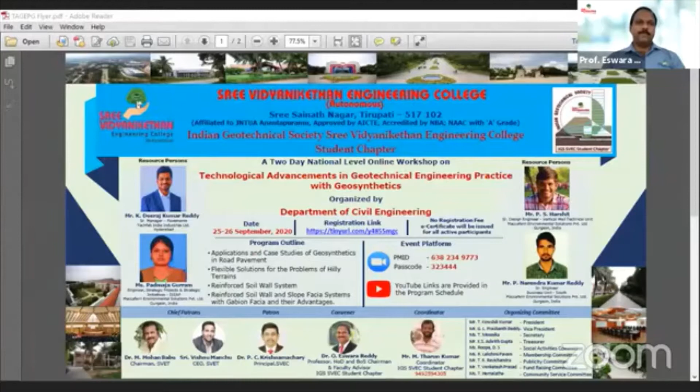This is the intention of this particular workshop, how it has been designed, and today is the implementation, day one. So I thank all the alumni, Padmaja, Dheeraj Kumar Reddy, Harshit, and Narendra Kumar Reddy. Fortunately, except Harshit, the remaining students are my project students. I appreciate their commitment and sincerity and discipline in delivering their duties at their own companies.

Whenever I call, they are responding in a positive way, contributing back to the institute in the form of continuous interaction, technically, as well as internships or placements, whatever it is. In these 2 days, we have 2 lectures each day. On day one, Padmaja and Mr. Dheeraj Kumar Reddy, and on day 2 we have Harshit and Narendra Kumar Reddy.

Majority of these 4 lectures are focusing on how best we can use geosynthetics in stabilizing various structures, in the field of pavements as well as geotechnical engineering, especially transportation engineering supporting structures like retaining walls and slopes, and how to stabilize soil wherever it has stability problems.

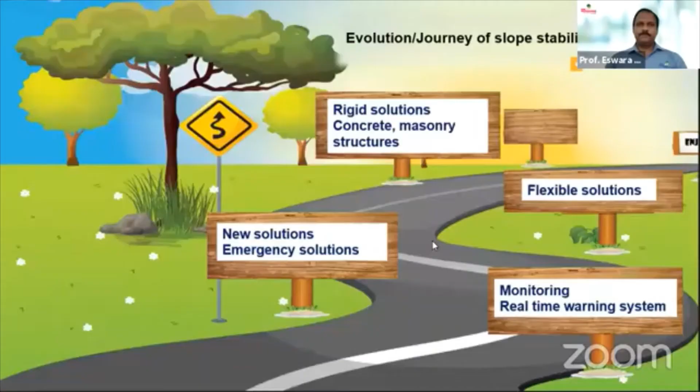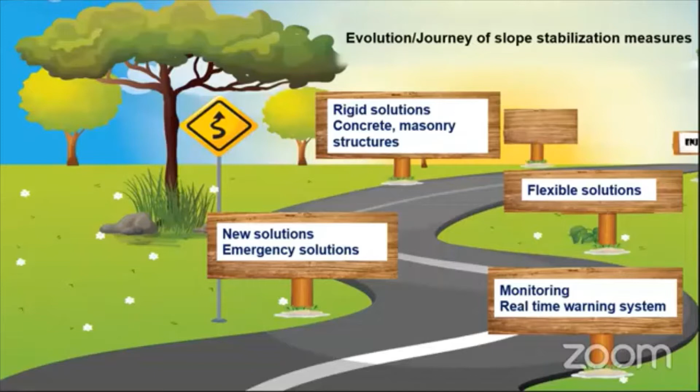So today I am going to talk about flexible solutions for the problems of hilly terrains. In this context, I will cover what are the challenges that we are facing in hilly terrains nowadays, and what are the remedial measures to mitigate these problems, along with case studies. There are solutions like avoiding or eliminating the problem itself, use of flexible materials, use of rigid solutions, and emergency solutions. There are so many varieties of mitigation systems which we can choose.

Coming to the next slide, before moving to the new materials and techniques for hill slope stabilization, let us see what are the challenges in hilly terrains. These are the typical landslides occurred in the Himalayas. I'm switching on, so you can see how massive these landslides are.

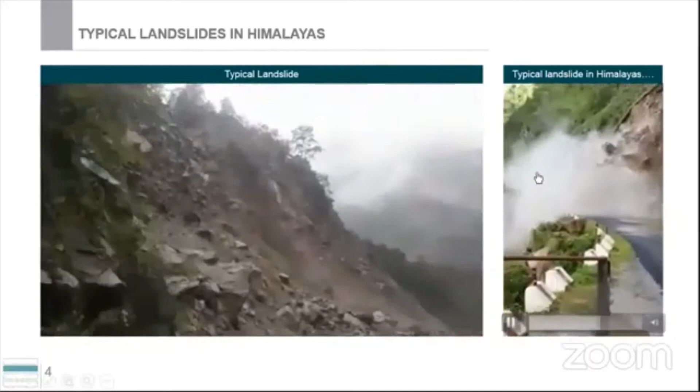Moving to the next slide, the slope instability scenario in our country. These landslides in the Himalayas are becoming a perennial problem. Each year during monsoons, at least four or five landslides are occurring in the Himalayas. Not only in the Himalayas, but also in northeastern regions, the Western Ghats, and the Nilgiris. So in a year during monsoon, so many landslides are occurring in our country.

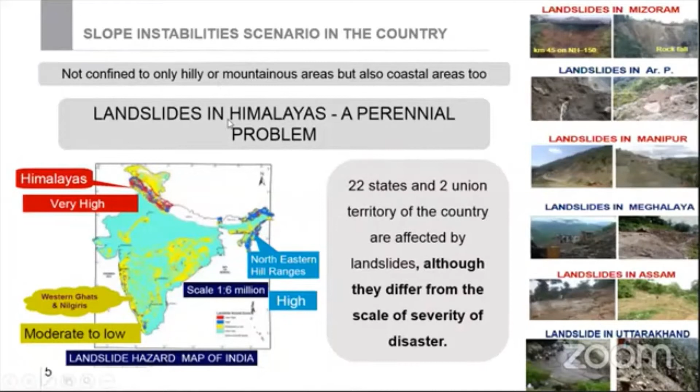22 states and 2 union territories of the country are affected by landslides, although they differ in scale of severity of disaster. Here I have listed where landslides have happened in different states or parts of the country. So landslides are not confined to only hilly or mountainous areas, but also to coastal areas.

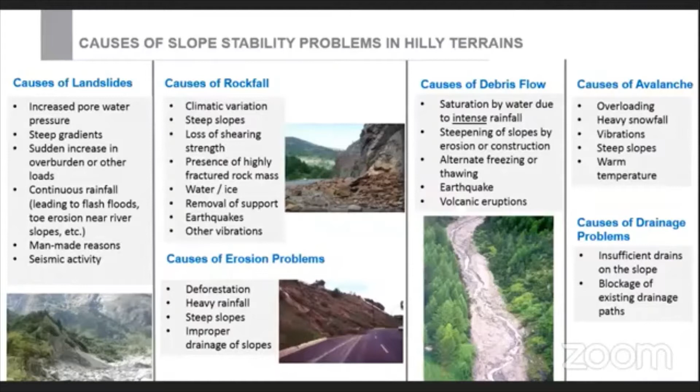Then what are the causes of rockfall? The causes of rockfalls are climatic variation, steep slope, and losing shear strength - as I told you with landslides, losing shear strength is one cause. Also the presence of highly fractured rock mass and weathered rock. If weathered rock or presence of high faults and folds are there, pore water will enter into that rock type and it will ultimately lose its shear strength. Then removal of support, earthquakes, and other vibrations.

Then what are the causes of debris flow? Debris flow is a mass movement of soil, water, mud, rock, and air - it flows like a mass movement, as we can see here. The causes of debris flow are saturation by water due to intense rainfall, steepening of slope by erosion or construction, alternate freezing and thawing, earthquake, and volcanic eruptions. Then we have listed the causes of avalanche here.

In landslides or rockfall, before treating mitigation measures for landslides, rockfall, or any other problems, we have to first concentrate on drainage problems. We have to plan the drainage network - how the hill, road, and valley are arranged, from where water comes from the hillside and how we divert that water on the road, and from the valley side, how we divert that water into the valley side river.

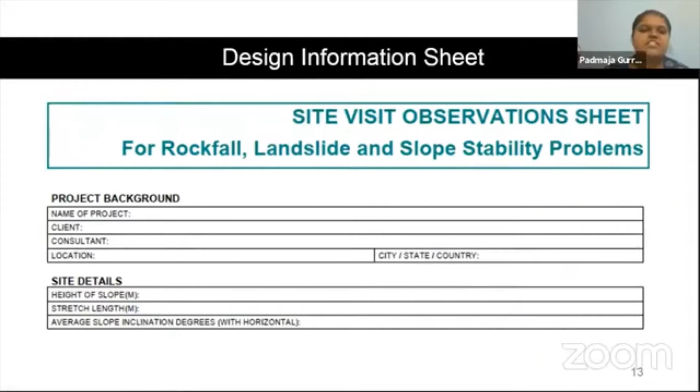The sheet includes project background and site details—if a slope is there, its height, stretch length, and average slope inclination, then condition of the slope. The crest is on top, and we note whether it's rocky or has overburden. By visualization we fill this design information sheet, noting type of strata, nature of slope—natural, excavated, or cut—and method of cutting adopted, and condition and type of rock or soil.

Then we check if there is any vegetation on the slope, and if so, what type of vegetation is present. We have to fill all these details first.

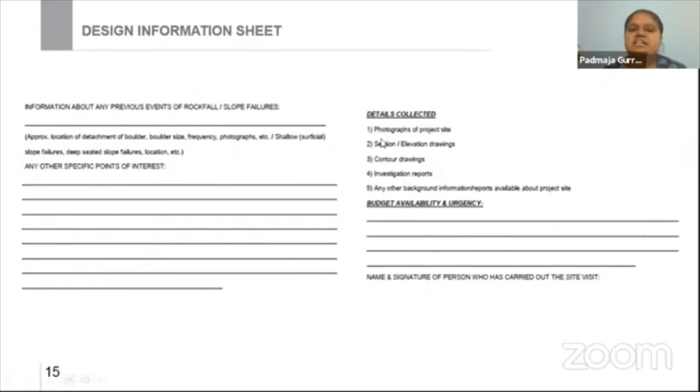Then we collect photographs of exactly where the problem is, and also from far distance to visualize the hillside, road, and valley side. We also try to get contour drawings and investigation reports if possible—these are the preliminary investigation details.

By site investigation we collect these details and can draw, by visual observation, how the hillside, road, valley side, and river are positioned. By seeing that, we can estimate approximate details, not exact ones.

For example, the slope angle here is 60 to 70 degrees and slope height is 30 meters. Vegetation is present—dense vegetation on soil—and the type of soil is a boulder-mixed strata. This much detail we can fill from site visit observations.

After filling the site visit observation details, we move to detailed field investigations. This means geological investigation—we do geological and geomorphological study.

Geological study tells us which type of rock is present, along with RMR values, RQD values, and faults and folds present there. Geomorphological mapping gives the landscape and landform overview.

Then geophysical study is an easy way to determine the subsurface profile. And geotechnical investigation involves field and laboratory investigation for soil and rock slope, plus hydrological investigation—these are the investigations normally done.

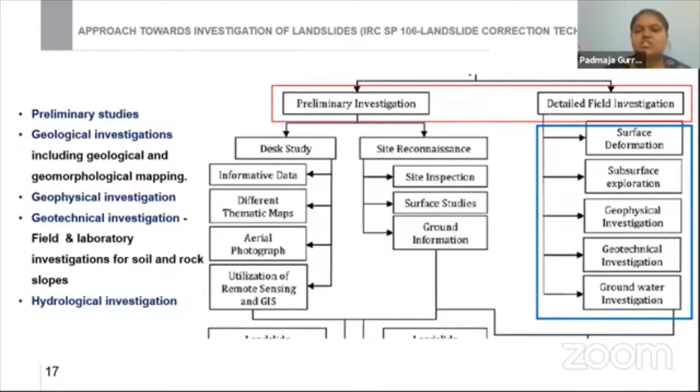After all these investigations, we determine the shear properties and other parameters. Then we choose mitigation measures depending on site conditions and various factors like availability of local material, space at the bottom of the valley side, and space at the bottom of the hillside. We have to choose the most suitable mitigation measures for that particular site.

For that we have to perform slope stability analysis, which we can do either using Slide software or other in-house software.

Then design of mitigation measures - we have to do the design for that. Mitigation measures here include hillside cutting, erosion control measures, nailing or anchoring, then retention measures, reinforced soil systems, Gabion walls, etc. So these are the many systems we have to design.

After that, construction and survey. So this is the steps.

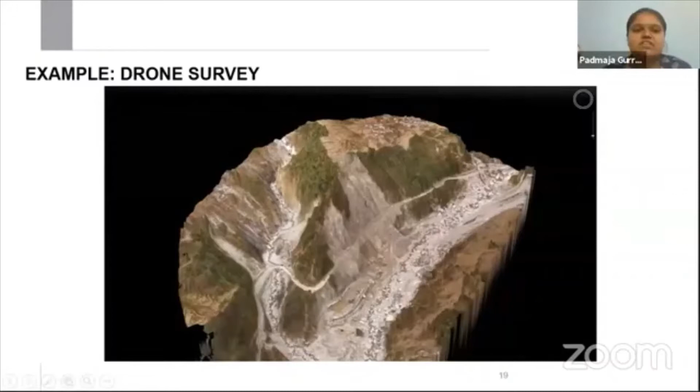So we have to do monitoring also, because other landslide prone areas are moving - these are moving, as I told you, more than 1 centimeter in a year it is moving. So our structure, whatever we are providing, needs to accommodate that movement.

Once you provide rigid structures like RCC walls, random rubble masonry walls, cantilever walls, counterfort walls - if you provide those retaining systems as a mitigation measure, it will not accommodate the movements of the Himalayas or other landslide prone areas. After some time, once it gets those movements, cracks will automatically develop on the surface of that rigid structure.

So in those cases, to accommodate the movements or displacements, we have to go with flexible solutions. What flexible solutions will do is accommodate the movements, so it will not crack. I will show you.

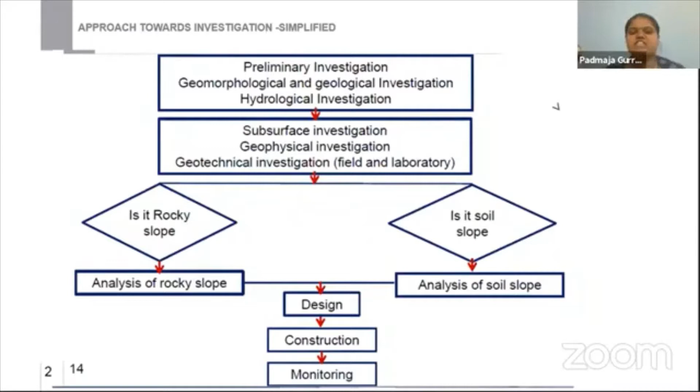So these are the investigation reports - engineering investigation, communication between engineers, field observation we have done, then laboratory test. It will come from the investigation reports and results of field survey, estimate engineering properties of slope, then achieve engineering purposes.

Then solution for the problems of hilly terrains. So we have seen what are the problems and challenges we are facing in hilly terrains and what are those causes. And we have seen detailed investigation. Now we are going to talk about solutions for the problems of hilly terrains.

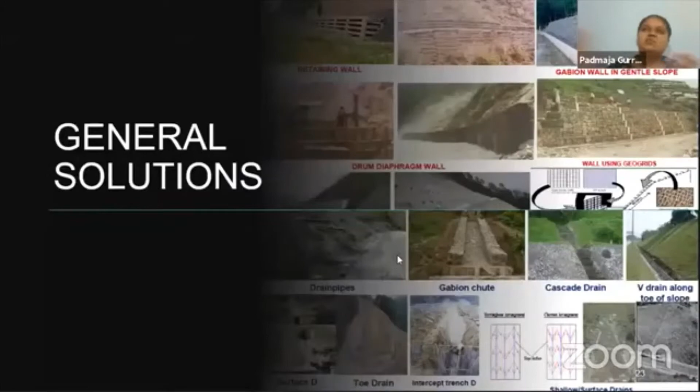So what are the general solutions? Just providing one masonry wall or one retaining wall will not solve the problem. In this situation, we have to go with a multidisciplinary approach - combinations of solutions we have to use.

So what are those solutions normally we will do? Avoiding the problem or choosing an alternative alignment or relocation. Then use of lightweight materials in construction or rehabilitation. Then modification of slope geometry to minimize driving forces and or improve resisting forces. Then provision of surface and subsurface drainage measures, ensuring holistic drainage network, erosion control and other surface protection measures, provision of restraining, retaining and protective structures - rigid and flexible systems, treatment or training of slopes subjected to hydraulic forces from water bodies, improvement in internal stability of slope by nailing, anchoring, grouting and micropiling, rockfall mitigation measures, debris flow mitigation measures and emergency measures. So these are the many solutions available nowadays.

So we can go one by one. First one is avoiding or eliminating the problem itself. If a new alignment is going through hilly terrains and huge landslides happen there, what do we have to do? We have to either do complete removal of the slide or provide complete mitigation systems, or we have to go with bridging or tunnel.

If we are not able to provide complete mitigation measures there, we have to go with the option of facility relocation. Here the facility is this highway - if a new alignment highway is going, we have to relocate this alignment, meaning we have to move to another area.

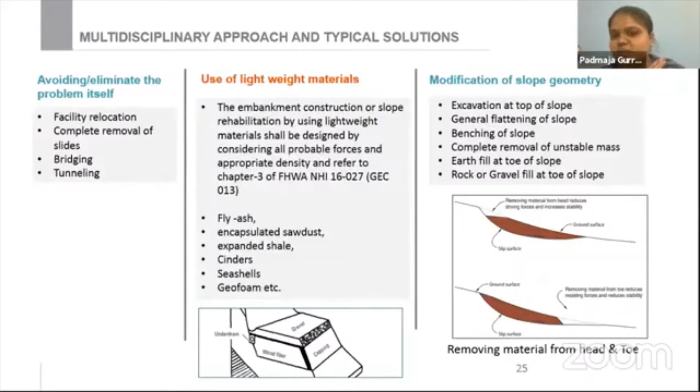Then modification of slope geometry. Here excavation at top of slope, general flattening of slope, benching of slope, complete removal of unstable mass, earth fill at the toe of slope, rock or gravel fill at the toe of slope. Modification of slope geometry means, normally if we have to widen the road, if the current road width is 7 meters, now we have to widen it to 12 meters. What we have to do is either cut the hill or increase the valley side retention. So when we have to do hillside and valley side both cutting or filling, we have to maintain a balance between both.

Then benching of slopes are also used to control erosion in soil cuts and establish vegetation. After this, it will provide some erosion control measures, some vegetation turfing or vegetation mats we will provide. So ultimately it will support erosion control measures.

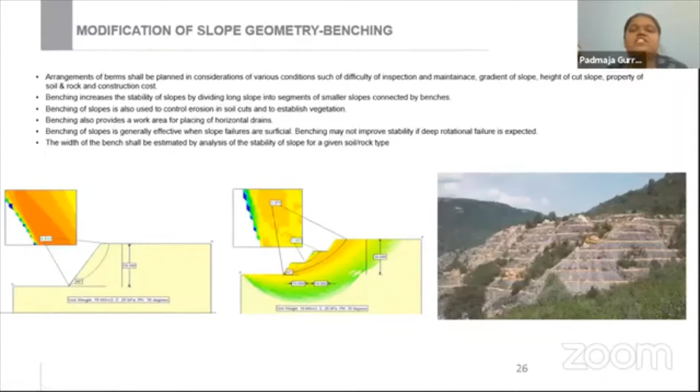Then modification of slope geometry. The objective of routine cuts and fills is to create road space for the road template. So we are going to create the road space, like for widening or new alignment. Then to balance the material, to minimize slope instability over time, not to be a source of sediment, and to minimize the long-term maintenance cost.

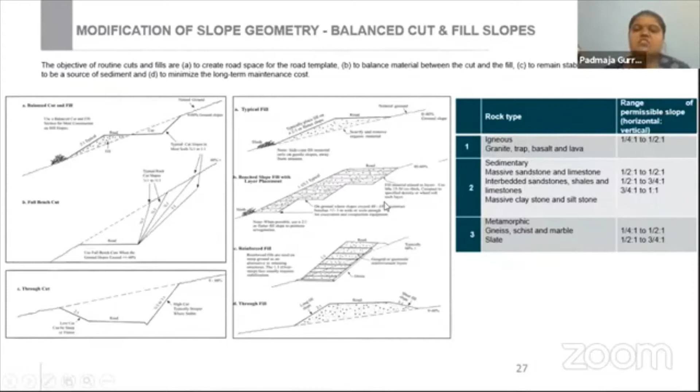Then drainage measures. As I have been telling from the start, drainage is a very important phenomenon in landslides. Improper drainage is a major triggering factor for landslides. So what are the different types of drainage measures? First is surface drainage measure, and next is subsurface drainage measure.

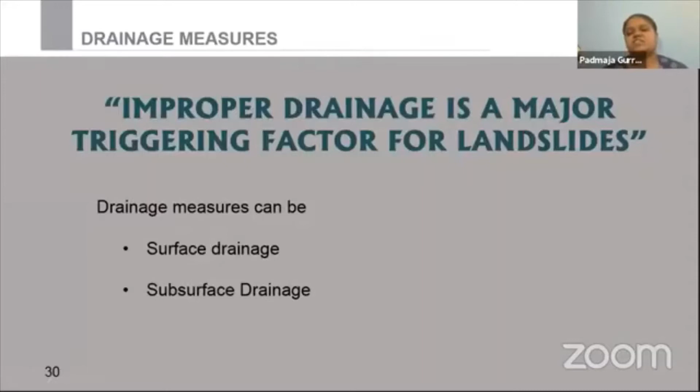Surface drainage measures are of 3 types: catch water and intercept drains, chute drains, and roadside drains. Catch water or intercept drains mean it is catching water from the hillside and diverting it to the next channeling media. So this is about the catch water drain and chute drain.

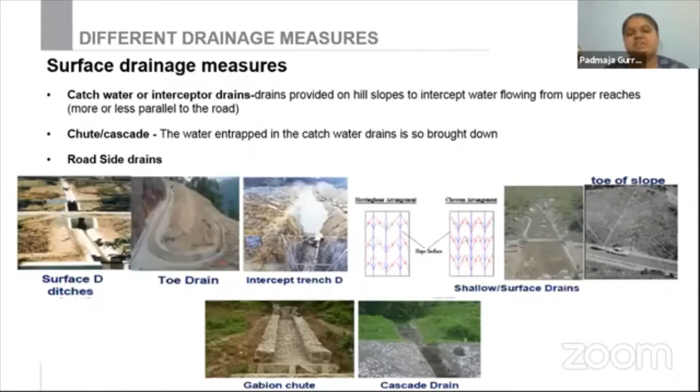This is the simple cross section we have made. Normally people provide chutes with concrete masonry and all, but here we have provided with gabion mattress. Then roadside drains along the road - all along the road we provide one roadside drain to capture the water from the hillside. So these are the catch water drains.

Then moving to the subsurface drainage measures: horizontal pipes, cut-off drains, drainage trenches, drainage blankets, internal drains of the reinforced soil system. These are the rockfall mitigation systems - I will take that up later.

So drainage pipes are there, horizontal drainage pipes are there. Whatever pore water pressure has developed comes out through these horizontal pipes. This needs to be designed and installed.

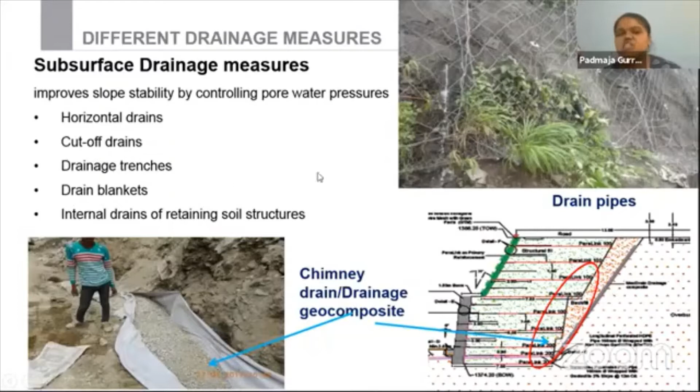In the reinforced soil system, in this area, we have provided a chimney drain. Chimney drain means a 600 mm aggregate layer - aggregate packed in geotextile that we provide here, or alternatively we can provide a drainage composite. These are the horizontal drains, installed like this. These are some examples.

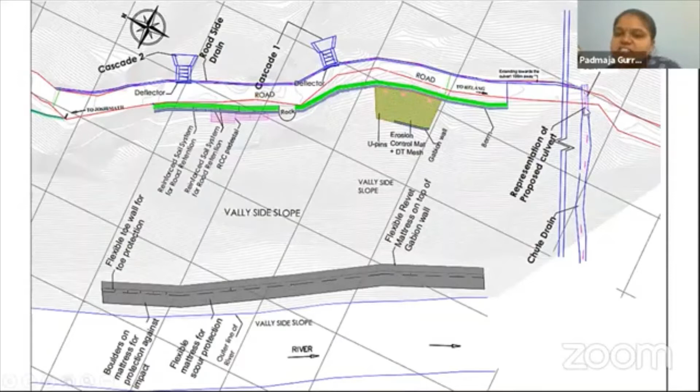Starting from the hillside itself, an existing culvert is there, and we are merging this existing culvert with the chute drain. This chute drain is directly touching the river. So this water from the hillside is directly diverted through the hillside to the river. This is the drainage plan.

Then retention systems - what are the rigid solutions? Normally random rubble masonry wall as a retaining wall we provide, and PCC retaining wall and RCC retaining walls, cantilever retaining wall, counterfort retaining wall, diaphragm retaining walls. These are the different types of rigid retaining measures.

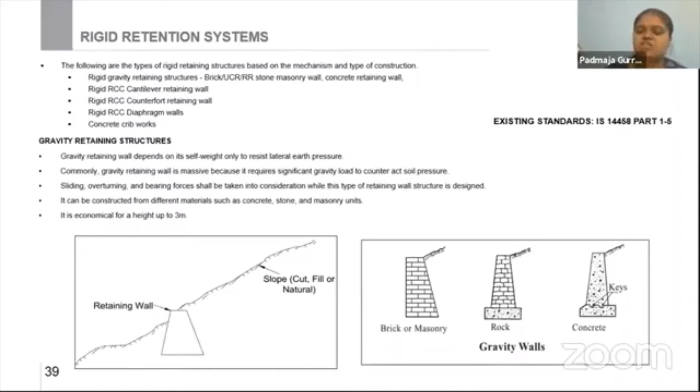But when we provide rigid retaining measures in places where movements are happening, they get shaken and develop cracks. Because of this, we cannot choose rigid gravity retaining structures. We will always go with flexible solutions - flexible solutions meaning gabions.

Gabion is a cage or box of twisted hexagonal steel wire mesh. It looks like this. After making these cages, we fill them with boulders or stones, then form a structure like this. Here, this is the backfill soil, and non-woven geotextile we have provided for soil protection and filtration. This is the ground level.

Here, one unit we have provided below the ground layer. This is called embedment depth. So these are the things.

Gabion retaining structures are commonly used retaining walls in hilly areas because of their flexibility and sustainability against dynamic forces like seismicity, seepage forces and flash floods. Because it is a porous structure, it gives good drainage. It will not develop pore water pressure as normal retaining walls do.

So these shall be preferred in case of poor foundation or seepage conditions, and can take considerable differential settlement and some slope movements. Wherever movements are happening in those areas, Gabion walls as a flexible measure are suitable. It is also employed for construction of erosion control measures, drainage structures, retaining walls, breast walls, and used to stabilize steep slopes in combination with other measures.

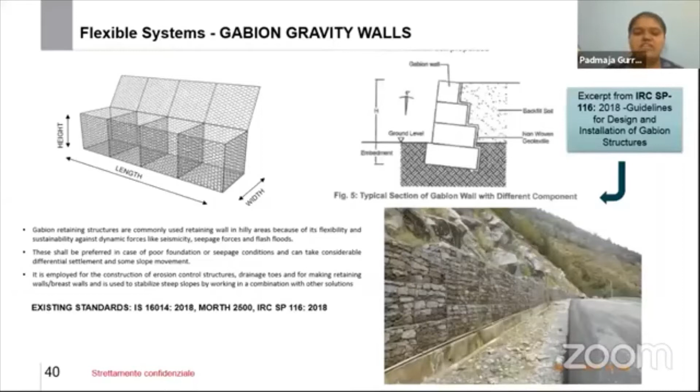So, normal design checks as we normally do for conventional retaining walls, we will do overall failure and global stability checks, then failure of foundation bearing capacity, sliding, overturning, and internal failure checks.

Moving to the next slide, these are the different standards available in our country now. This is IS 16014, 2018. It was revised in 2018. It gives the materials - boxes are made up of steel wire mesh - the material specification of the steel wire mesh, box dimensions, and properties like tensile properties, puncture strength, and pull apart strength. All these details are given in IS 16014.

Then similarly, MORTH also talks about material specification. IRC SP 116, 2018, talks about complete design and installation. Before these codes were published, like IS 16014 and IRC SP 116, these were not there during 2008-2010. At that time we were using BS 8002. This was published in 1998, the ASTM codes.

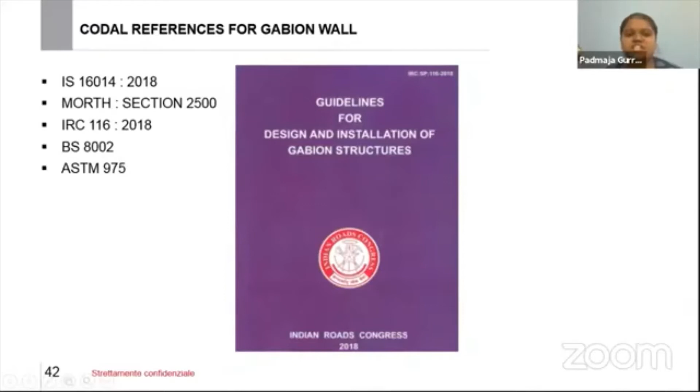Then what are the major advantages of gabions? The whole system is sustainable, green and flexible.

As I told you, this is a porous structure, and this structure we are going to fill with stones, rocks or boulders. So pore water pressure is released here, and it will not develop in the backfill. So this self-draining nature helps to dissipate pore water pressure. It is also green and flexible, with carbon footprint reduction and durability.

If you place a concrete retaining wall here, it will crack and segregate. So here we have provided a Gabion wall, a Gabion mattress. It is only deforming, not developing cracks, and it is accommodating the loads over it.

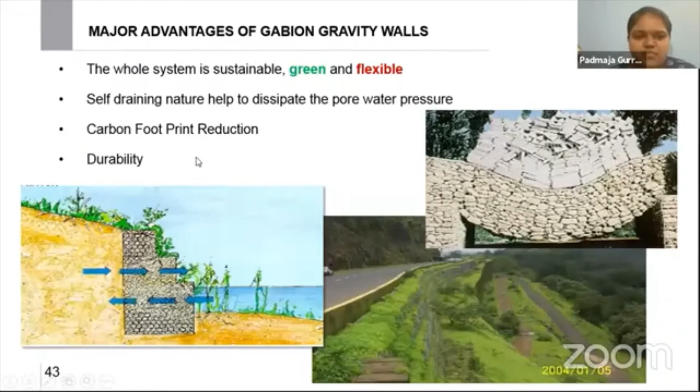Then here, Gabion retaining wall structures for landslide restoration works along NH47, Kerala. After construction it is looking like this, and after some years it is looking like this now.

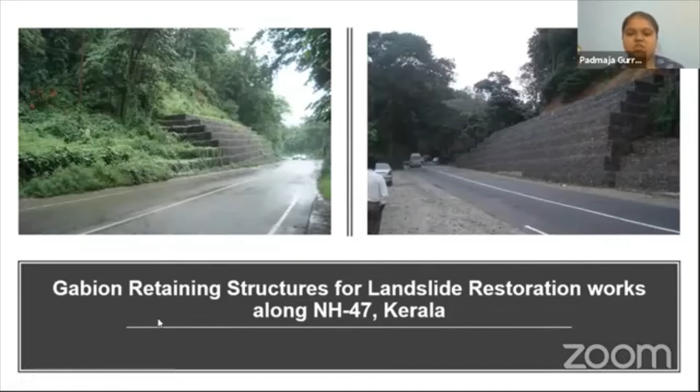Coming to reinforced soil. Why are we not going with normal retaining walls? Why are we going with reinforced soil? What is the advantage we are going to get?

Reinforced soil is a combination of soil and linear reinforcing strips capable of bearing tensile stresses. The reinforcement provided by these strips enables the mass to resist tension in a way earth alone could not do, because it is capable of bearing large tensile stresses. The source of this resistance to tension is the internal friction of the soil, since stresses created within the mass are transferred from the soil to the reinforcement strips by friction.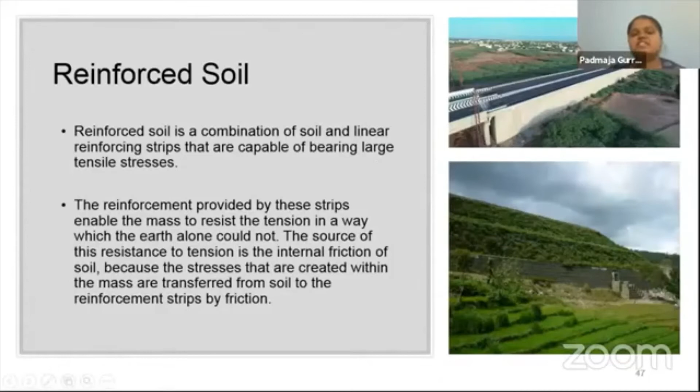So these are the reinforced soil walls. In reinforced soil retaining structures, there are different types: first reinforced soil wall, next reinforced soil abutment, and next reinforced soil slope.

Reinforced soil wall is steeper than 70 degrees, between 70 to 90 degrees—we call it reinforced soil wall. If it is less than 70 degrees, we call it reinforced soil slope.

In the reinforced structure, there are different components. First is fascia, then reinforcing material, then structural fill or reinforcing fill, then backfill, and drainage arrangement. These are the normal components of reinforced soil walls.

So first is soft fascia. Coming to the fascia—soft fascia is there, flexible fascia units are there, wraparound fascia, bagged facing units. Then flexible fascia, gabion facings we will use, and metal or woven wire mesh units we will normally use.

These aspects will be covered in more detail by Mr. Narendra tomorrow.

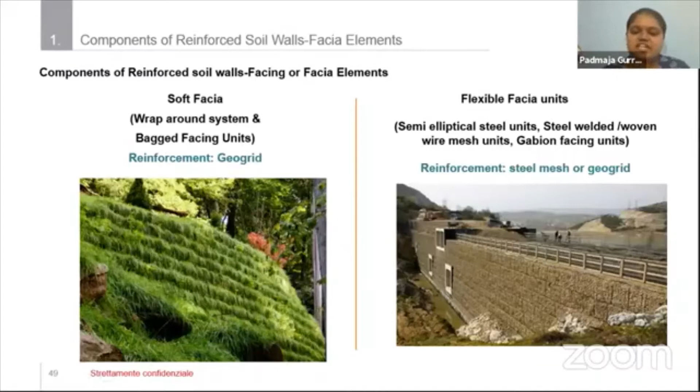Then components of reinforced soil slope—reinforcing elements. These are the reinforcing elements used as reinforcement in the reinforced slope or wall: metallic ones made up of steel, mats of metal, steel grids that are woven and welded, and shielded wire meshes. These are the fascia systems, and this is the reinforcement.

This will act as a secondary reinforcement—it is a steel wire mesh reinforcement. Then there's synthetic reinforcement made up of geosynthetics.

What are the different standards available in our country for reinforced soil structures? IS 14458 parts 1 to 4 give retaining wall design for hilly areas—different rigid retaining walls, design and installation.

Then IRC SP 116 covers design and installation of gabion structures. IRC SP 102 provides details for reinforced soil walls where the wall angle is more than 70 degrees, along with MORTH specifications. BS 8006 part 1 also gives design and installation aspects of reinforced soils. Similarly, FHWA standards, EN ISO 14475, and AASHTO.

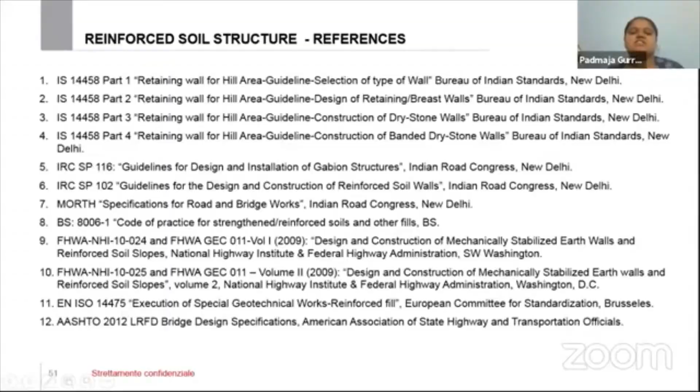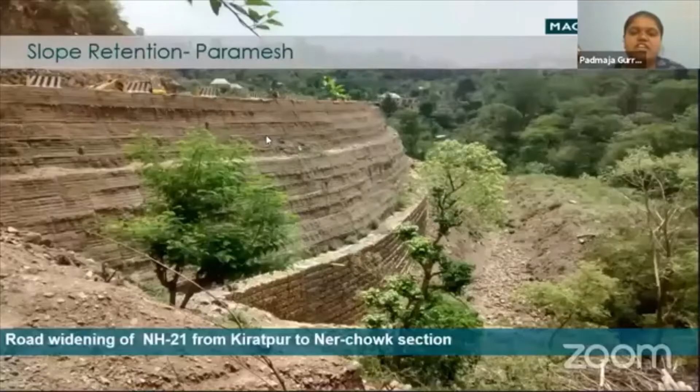Then control measures.

After covering retention systems—gabion, rigid retaining walls, flexible retaining walls, and reinforced soil systems—now we are moving to erosion control measures.

Soil erosion is a process of detachment and transportation of soil by water and wind. If the topsoil does not have enough strength, when rainfall occurs it will automatically detach. This is soil erosion.

So normally for erosion control measures, there are two types of facings we use. One is shotcrete facing, made up of steel and concrete. In places where landslides or rockfalls are occurring, shotcrete facing is not a preferable choice. Then we go with vegetation facing, a flexible facing.

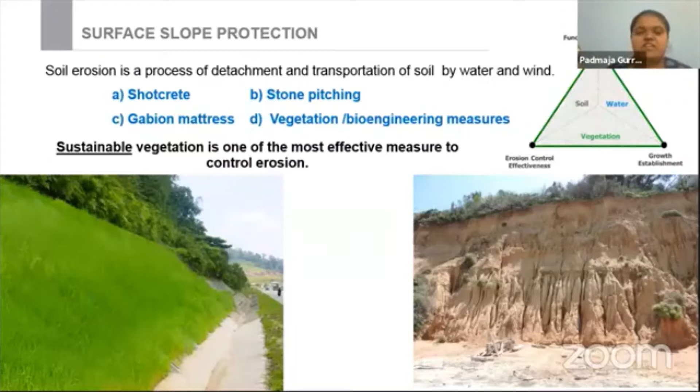Different types of erosion control measures include simple seeding or turfing. If a slope is there, we directly sprinkle seeds and manure, and after some time vegetation will come. This vegetation's roots will develop strength in the top surface layer, so it is effective only after establishment of vegetation.

Then other types are rolled erosion control measures and hydraulically applied erosion control measures. These provide protective cover resisting soil erosion, retain runoff, and facilitate establishment of vegetation. These are the geosynthetic erosion control mats which we use.

I will explain here. There are three types of mats normally used. Biodegradable mats—ultimately, when providing mats on a particular slope for erosion control, we first have to think about the slope angle. It ultimately depends upon the slope angle and rainfall intensity of that particular application.

Biodegradable mats are made up of coir or natural geotextile, suitable for gentle slopes and low rainfall intensity applications. After laying these mats, we sprinkle seeds and manure, and then do watering and maintenance for the vegetation.

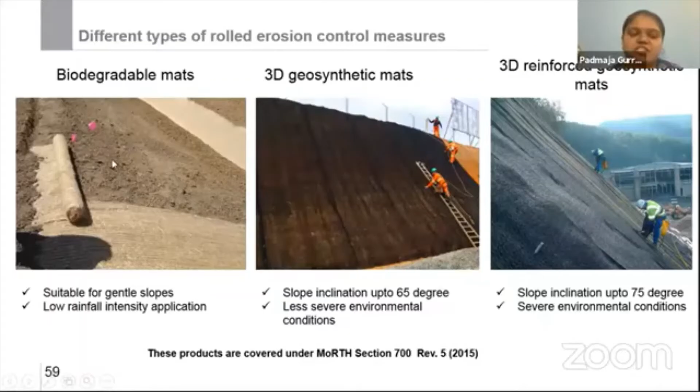Then we have hydraulically applied erosion control measures, applied via the process of hydroseeding. This is a process where seed and any combination of fertilizer, lime, biostimulant, moisture retention polymer, tackifier, and other additives are combined with water and hydroseeding mulch to form slurry and sprayed on the ground surface.

If a topsoil layer is there but it does not support vegetation at all, it looks like barren land. We have to test this topsoil to check whether it allows vegetation growth—agronomical testing. Once it is capable, it is okay; if it is not capable of growing vegetation, we have to do one more thing.

Flexible growth medium and biotic soil media are options here. This biotic soil media is a topsoil alternative from which we can grow vegetation.

After that, flexible growth medium—as told before, this is a process where seed and any combination of fertilizers are sprayed on the surface.

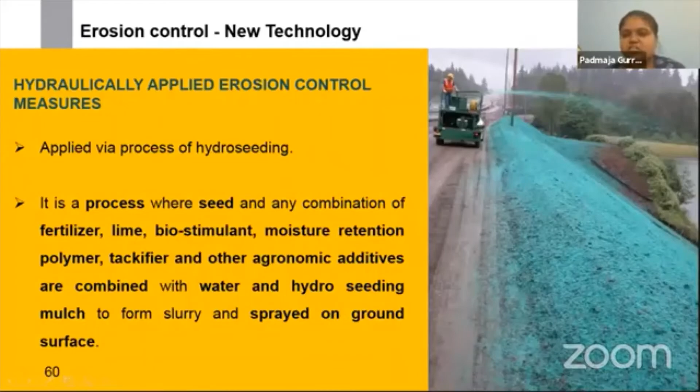So these are the erosion control techniques. Then river training measures—when a river runs parallel to the valley side slope, as in the Himalayas, rivers have greater velocity, like 6 to 7 meters per second. With such rapid velocity, the river will develop scour holes and cause erosion in that slope, affecting the entire slope.

So to reduce erosion along the river side or river slope, we have to provide spurs, groins, or aprons, pitching, etc. The materials used for riverbank protection along the river shall be flexible structures like riprap at the toe of the slope, or provide mechanically woven steel wire mesh gabion boxes or mattress, or fabric form mattress.

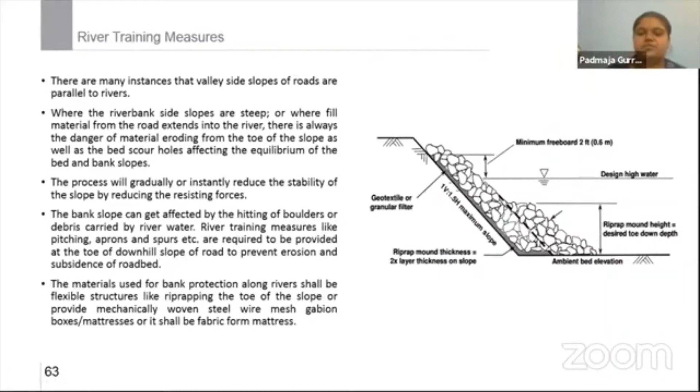So here, this is pitching, a combination of big boulders placed together. An alternative option to pitching is the provision of gabions. Here we have provided a gabion toe, then a mattress. This is the gabion toe, this is the hill side, this is the valley side, and here the river is flowing. So here the mattress is placed.

Another alternative option is fabric form mattress. It is like two geotextiles where we can pump concrete in between. We pump the concrete and lay it in situ, like this. After some days, the geotextile will degrade and disappear, and then the concrete will act as a fascia here, as an apron.

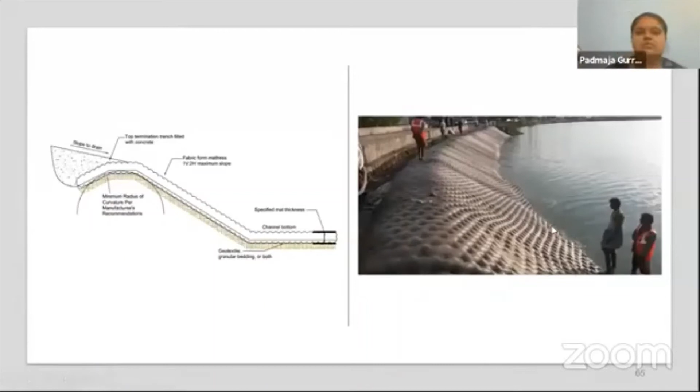Then nailing, anchoring, or bolting. When our slope is not geotechnically stable, we have to strengthen the slope. For this, we normally go with nailing, bolting, or anchoring. So for this, different types of fascias are there.

The first one is a flexible structure facing with gabion fascia. This is nailing, where we have provided gabion fascia, and here geotextile is used for separation and filtration layer. So this is how it looks inside - soil nailing with gabion fascia.

Another fascia is soil nailing with flexible mesh - this is a mesh system. This has actually been provided for rockfall protection works.

Then cut slope stabilization - this is near the Kerala, Tamil Nadu border. Here the slope is 79 degrees, a very steep slope, and it is geotechnically not stable. For that we have provided soil nailing, and as a fascia we have provided erosion control measures. So reinforced geosynthetic erosion control mat we have provided, then hydro seeding we have done. After vegetation, it looks like this. So here are the execution photographs.

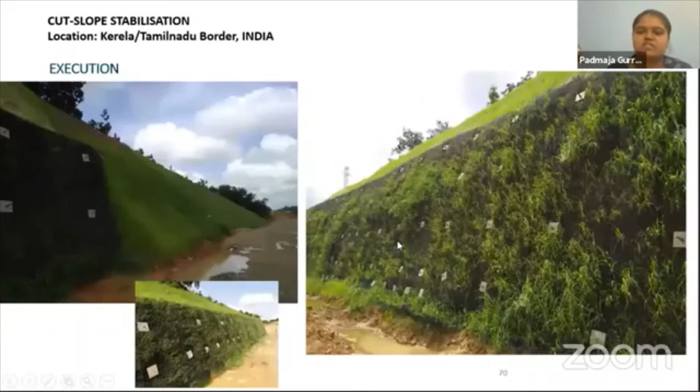Then rockfall mitigation measures. As we discussed earlier, rockfall is the detachment of rock with movement in the process of rolling or sliding. So what are the different types of rockfall mitigation measures? We cannot stabilize the rockfall, but we can protect our infrastructure, our highway or railway, whatever it is. First of all, there are 4 types of rockfall mitigation systems: rockfall warning systems, rockfall protection measures, retention measures, and prevention measures.

Warning measures mean, as the name itself says, warning. Whenever a landslide or rockfall is happening there, it will give a signal to the located area. So this is our warning measure. It is under developing stage now.

Then rockfall protection measures - berms or benching. In soil slope also we have discussed about berms or benching to stabilize the area, to provide erosion control measures, and to provide a stable workspace area for horizontal drains. So these are the advantages of berms or benching in soil slope.

Now we are going to discuss, for rockfall, how berms or benching help, along with drapery systems, rockfall barriers or embankments, rockfall ditches and trenches, rockfall attenuators or hybrid barriers, debris flow barriers, rock sheds or tunnels, and erosion control mats. Then retention measures - what retention measures do is retain the debris from falling down the slope. Retention measures include mesh with nails or anchors, surficial strengthening, shotcreting, and chemical stabilization of the slope face. Then rockfall prevention measures act to control the detachment of rock or stabilize the rock slope. So these are the different techniques of rockfall mitigation systems, and we will discuss them one by one.

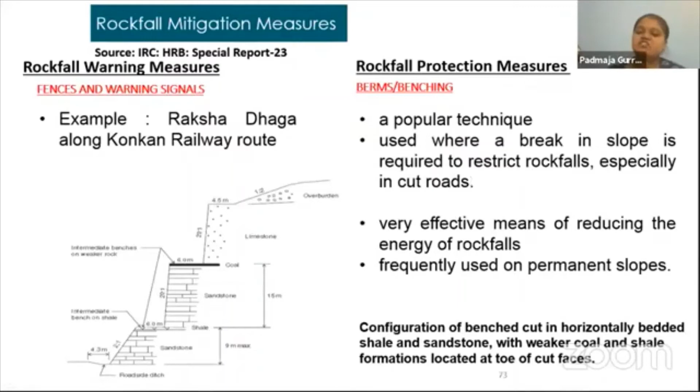So once this benching is provided, we will ultimately reduce the energy of falling rocks, frequently used on permanent slopes. Then after that, the drapery system is there.

It is a steel mesh system aimed at controlling rockfall along the slope. This is a slope and this is the road going through. To prevent and protect against fall, we provide a steel wire mesh system here, anchored at the crest of the slope. If enough space is available at the top, we provide a trench. Whatever rocks are falling will travel through this mesh system and fall here. By maintaining it, we can remove this falling debris, rocks, or stones.

In case space at the toe is not available at all, we will do anchoring at the top and bottom portion. The rock that detaches travels through the slope. After that, these are temporary only - we can remove the debris or rockfall and keep it here again. So these are the techniques of different simple drapery mesh systems.

Then coming to another system, rockfall barrier structures. We don't know from where the rockfall is happening because the height of the slope is much more here - I don't know exactly where the rockfall is coming from. So in those cases, to catch and stop the falling rock, we provide rockfall barriers. These are flexible rockfall barriers.

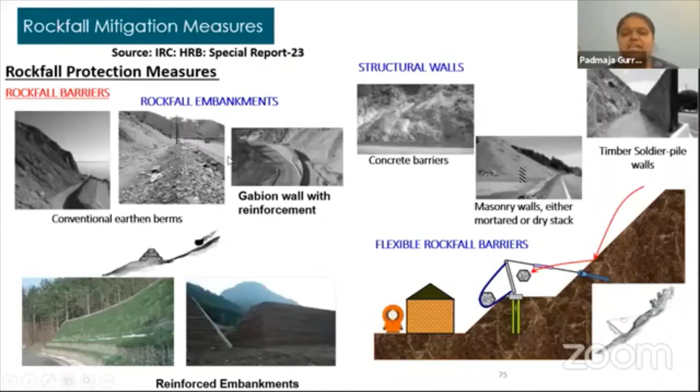After that, debris flow barrier is there, made of flexible ring nets, withstands high static and dynamic loads, separates the water from debris, thus reducing the destructive force. By providing a flexible debris flow barrier, the debris will be retained - we will keep the debris away, and water will go through this. So this is a debris flow barrier.

Then rockfall ditches and trenches - these are also similar techniques made at the toe of the slope to contain falling rocks. We make this rockfall ditch at the toe of the slope, so whatever rockfall is happening, the rocks get detached and occupied here. This is one of the most effective permanent rockfall systems for most highways when properly planned.

Then erosion control measures - if rock alone is there, then we cannot provide any vegetation. But if soil and boulder mix is there, then in those cases we can provide it. This is used when the slopes to be protected contain soil mixed with boulders, designed to allow passage of water while retaining in-situ soil without clogging.

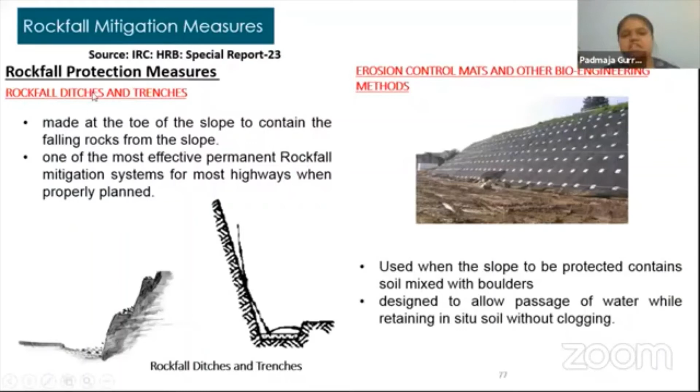Then coming to rockfall protection measures - in these measures, rock sheds and tunnels are there that we can construct. This is a tunnel, this is a hill, and through this the road is going. Then this is a rock shed - this is an infrastructure.

These are widely used on steep slopes above narrow railways or roadways, requiring a steeply sloping roof covering a relatively narrow span. These are the different rock sheds or tunnels.

Then we discussed rock protection systems, which protect, and retention systems which retain the slope. These are mesh with nails or anchors for surficial strengthening. On the top surface we provide a steel mesh along with surficial anchors, so whatever local detachments occur, the mesh will hold them between the anchors.

Then shotcreting, used in cases of severely jointed rock forming small blocks, weathered rock surfaces and zones of erosion. This is for erosion control application only, using rock shotcrete. For closely fractured rock, we apply shotcrete with cement concrete.

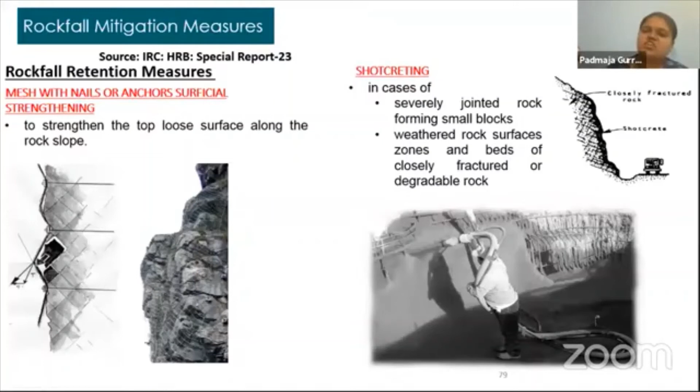Then prevention measures, which completely stabilize the slope. We do this in soil and clays also. If it is not globally stable, we will do nailing, anchoring or bolting. Similarly in rock falls and rock slopes, we will do nailing, anchoring and bolting. Other measures include buttress supports, reaction walls and shear keys.

Anchors are provided to prevent sliding of blocks or wedges of rock on discontinuities dipping out of the face. Buttress supports retain and protect areas of weak rock to support an overhang, since if an overhang is left unsupported it will eventually detach and fall on the road.

Shear keys provide support for blocks of rock up to about a meter thick, as well as zones of loose and weathered rock at the crest of the slope. The reaction wall protects against raveling of the rock and acts as a large reaction plate for the rock anchors.

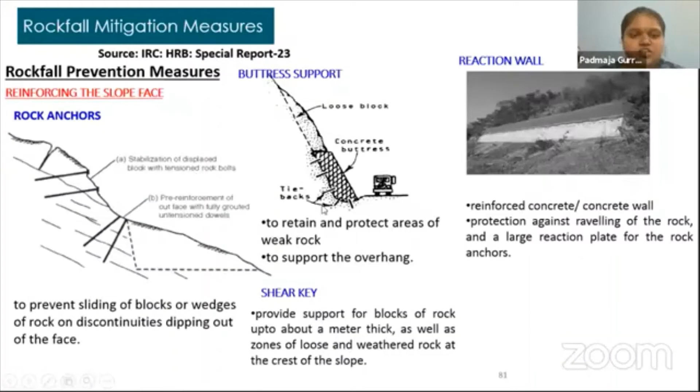Then these are other techniques: scaling and trimming. We have to do scaling, either hand scaling or mechanical scaling, and trim blasting, which are other techniques of rock removal.

After rockfall mitigation measures, we discuss debris flow mitigation and emergency solutions. This is a debris flow barrier, which separates water from debris. The debris stops at the barrier while only water passes through, and we then remove the debris from the slope.

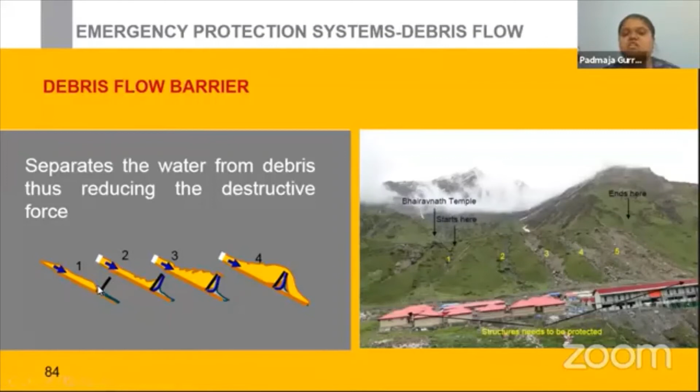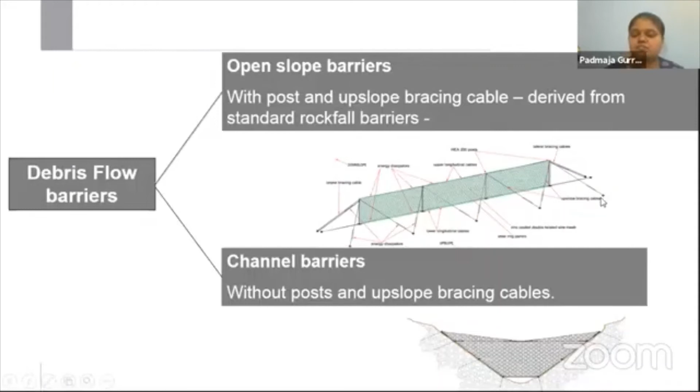These are different types of debris barriers: open slope barrier and channel barrier. The open slope barrier has posts and bracing cables, whereas the channel barrier does not have posts and bracing cables. These are the posts, and these are the bracing cables. This is an open slope barrier, and this is a channel barrier without posts or bracing cables.

Then emergency protection measures, used if you don't have enough time to install a debris flow barrier, or cannot transport material to the site. In such cases, debris emergency solutions are helpful. They have advantages: rapid and simple to deploy, flexible and light, simple connection between units, using locally available material, and easy transportation. This is one of the emergency measures.

This is an ErdoX consolidation unit. It is a pyramidal shape steel modular structure provided with a mono anchoring nail, which is very light, versatile and easy to install, used for superficial soil stabilization and emergency intervention, also against debris flow.

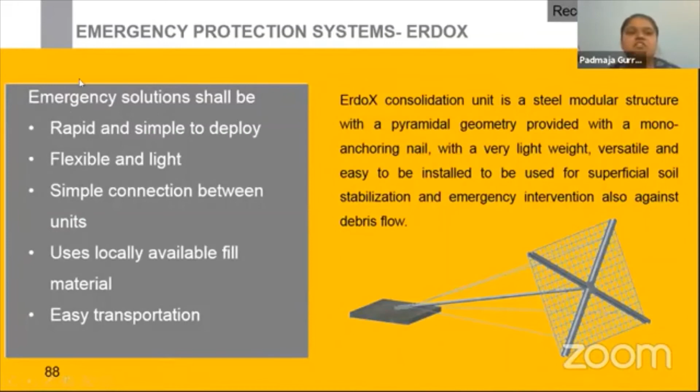It is normally used to protect slopes subjected to high erosion, and for stabilization of gullies, debris flows, and reconstruction of slopes. It shows particular efficiency and versatility, allowing intervention even in extreme conditions with significant structural and mechanical efficiency, and is economically feasible to cover up to a depth of 9 meters.

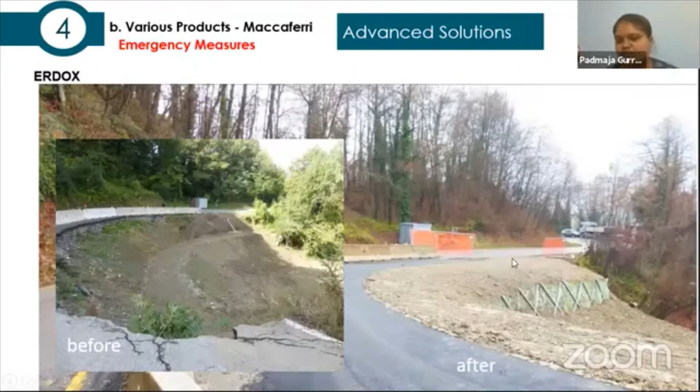I will show you one by one where we have applied this, as already explained. Before this, there is a valley slide slope with a road going through it. Before treating it with any retention or mitigation measures, the slope looked like this. After installing emergency measures, it got stabilized. So here is how it was before, and how it is now after treatment.

As we all know, Uttarakhand is a land of gods, one of the most beautiful northern states of India with spectacularly scenic landscapes. Uttarakhand is a very religious and pilgrimage city.

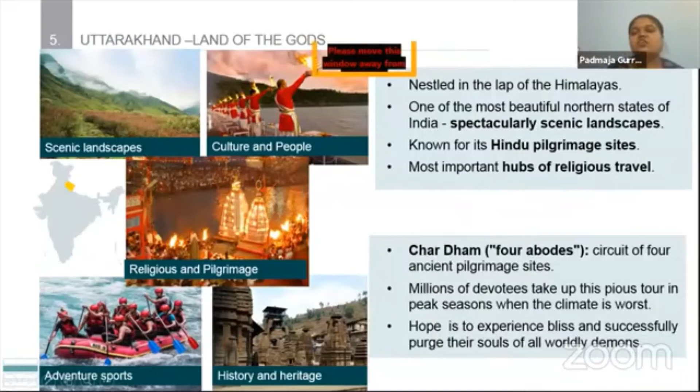Char Dham Yatra is one of the most religious events there, a circuit of 4 ancient pilgrimage sites: Yamunotri, Gangotri, Kedarnath, and Badrinath. Millions of devotees take up this tour in peak season when the climate is worst, hoping to experience bliss and purge their souls of all worldly demons. To reach Kedarnath, Badrinath, or the other locations, there is only one route, and that is NH58.

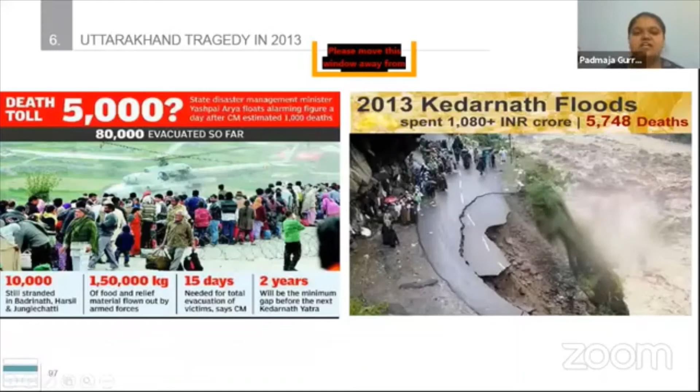As we all know, in 2013 a cloud burst happened in Uttarakhand. Here is how it looked before the heavy floods, and here is how it looked during the heavy floods. We can observe here how much the water level increased.

This is a map I have already shown to you. The first one is landslide mitigation measures at Uttarakhand. Now we are going to discuss Helang.

For this project, the client is MORTH, Ministry of Road Transport and Highways. The authority engineer is Magotec, and the contractor is RG Buildwell Engineers Limited.

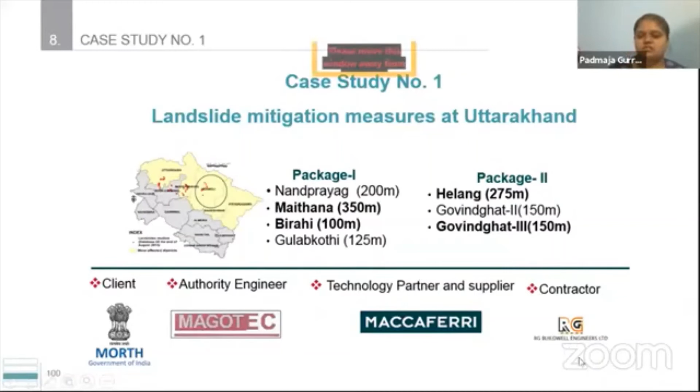The project requirement is geometrical improvement of road alignment. We have to improve the road from 7 meter width to 12 meters, widening the existing 2-lane road to a 12 meter road, making it a safe road.

Next are the problems of causative forces: flow of overburden material from the hill slope directly to the valley slope, surface runoff and gully formation on the slope surface. This existing culvert has been blocked by debris, and because of this, pore water pressure is getting increased.

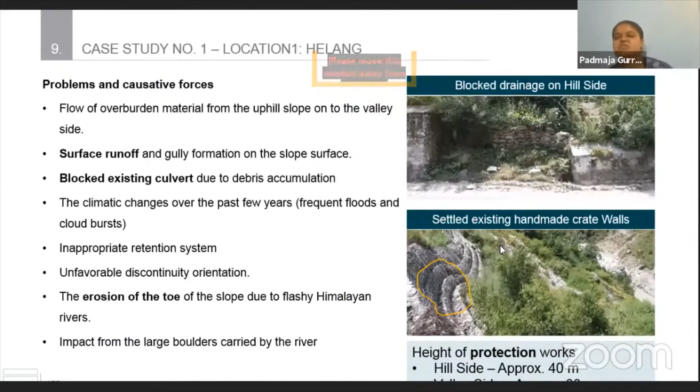Other causative factors include climatic changes, inappropriate retention systems, unfavorable discontinuity orientation, erosion of the toe of the slope due to flashy Himalayan rivers, and impact from large boulders carried by the river. This existing handmade retaining wall has settled there.

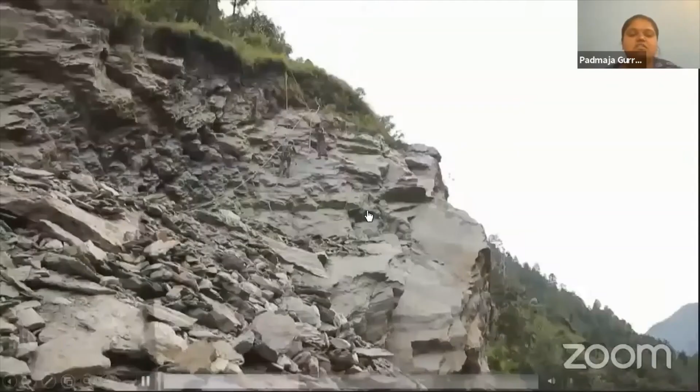So we have seen the challenges and the causes of slides and causative forces. Moving to the landslide itself: the Helang landslide zone is on the NH58 route, and this is the typical landslide zone towards the valley side. In addition, unscientific drainage and slope movement along the planes are major factors for sliding, in addition to erosion.

What mitigation measures have we provided? For hillside protection, we provided a simple drapery system as a rockfall protection system, and a debris flow barrier to collect the debris. For valley side retention and erosion control protection, we provided reinforced soil structure with gabion facia as one type, and vegetation facia as another.

Then we provided drainage measures, and for riverside measures, a launching apron and gabion toe wall. This is the hillside, this is the road, this is the valley side, and this is the riverside.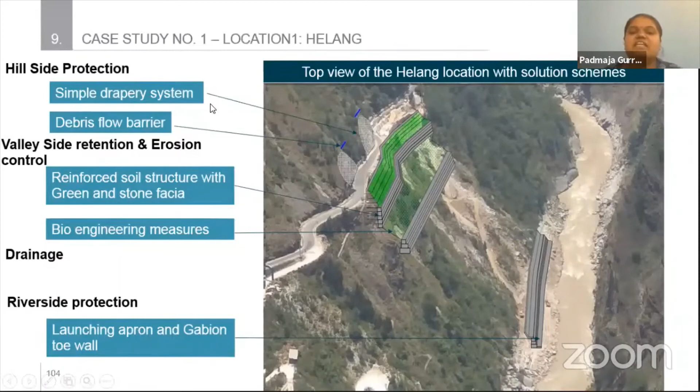Next is toe protection of the slope and riverside protection works. The river is going here, the valley side is there, and this is the riverside. If water moves with rapid velocity, it will cause erosion. For this, we provided a gabion wall of 3 meter height, and a gabion mattress as a launching apron, with big boulders placed over the launching apron to prevent direct impact from large debris.

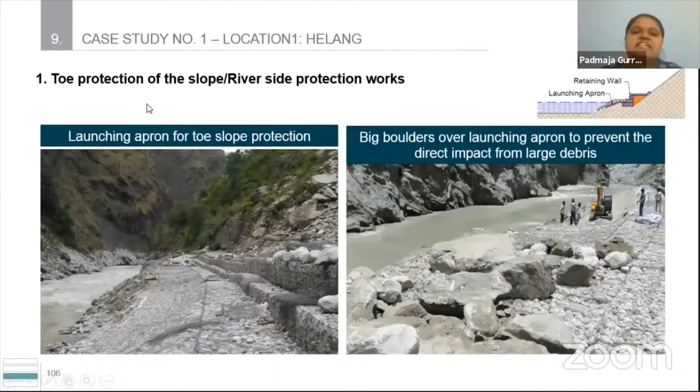Then for the valley side retention system, we provided reinforced soil measures. We designed this reinforced soil system with our in-house software called MacStARS, based on BS 8006 Part 1 static analysis and AASHTO standards.

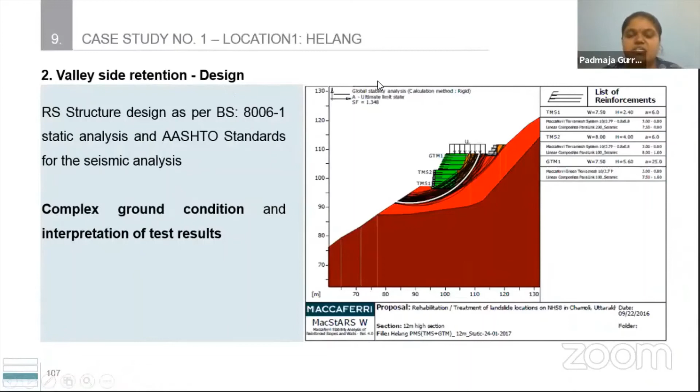Then hillside protection using simple drapery and debris flow barrier. So simple drapery with deep top anchors to protect a 50-meter stretch of strata with fractured rock, and debris flow or rockfall barrier at the natural drain over cascade structure to protect against debris flow.

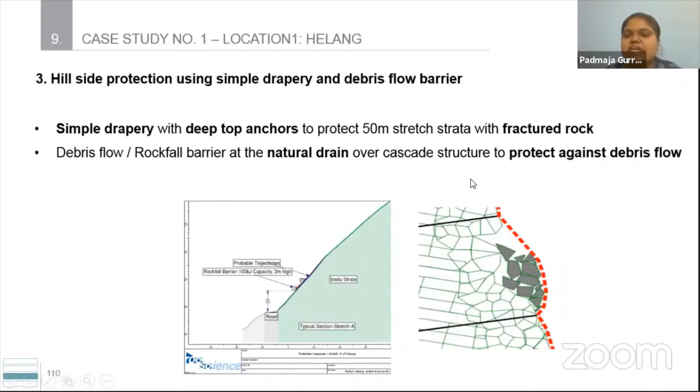This is a simple drapery system as a protection measure to collect the falling rocks. Then this is a rockfall barrier with dual function, to collect the rocks as well as debris.

Then instrumentation, because here in the Himalayas movements are happening every year. Whatever flexible structures we are providing there will accommodate and move with the nature, move with that slope.

So to measure these movements, stresses, earth pressure, or pore water pressure, we have to install some instruments to monitor. By monitoring it, we can determine the values - what earth pressure is developing there, and what piezometric pressure is developing there.

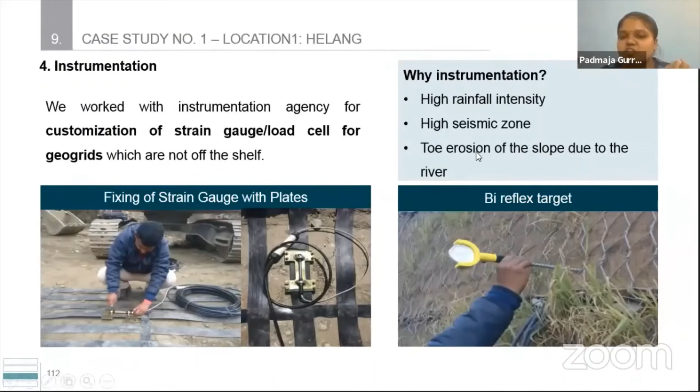So why instrumentation? Because these slopes are high, located in high rainfall intensity zones, high seismic zones, and experience toe erosion of the slope due to the river. So these are the sum of reasons.

Here, inclinometer will give the movement, whether our reinforced soil is moving horizontally or vertically. Earth pressure cell will give the earth pressure developing there. So these are the different types of instruments installed.

Then this is another case study, Maithana. Here, as a hillside solution, we have given a nailed gabion wall, roadside drain, and nailing. So valley side retention, again reinforced soil system. Then gabion toe wall for river training measures.

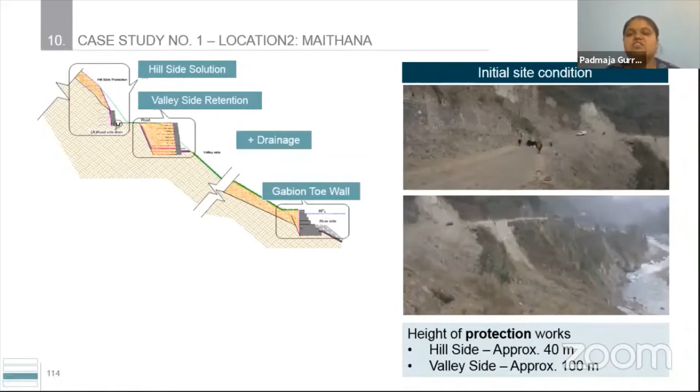So here the chute is there, then here the cascade is there. This is a reinforced soil system. Here again a culvert is there, so through this the water will channelize.

This is a chute drain, it is directly going through to this river. So this is a chute drain. Water will collect from here, so this travels to the chute drain.

Here river training measures will come, so this is a river. For river training measures, we have used a gabion toe wall and river mattress, gabion mattress as a launching apron. So water will directly come to this and be diverted to the river.

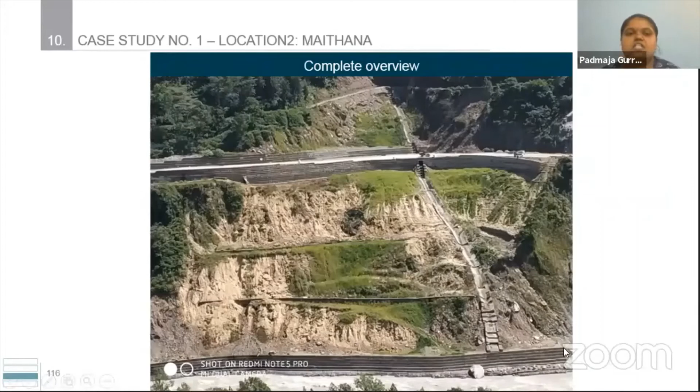So before construction it was like this. Then after construction, this is a chute drain and this is a reinforced soil system. This is the river and these are the river training measures.

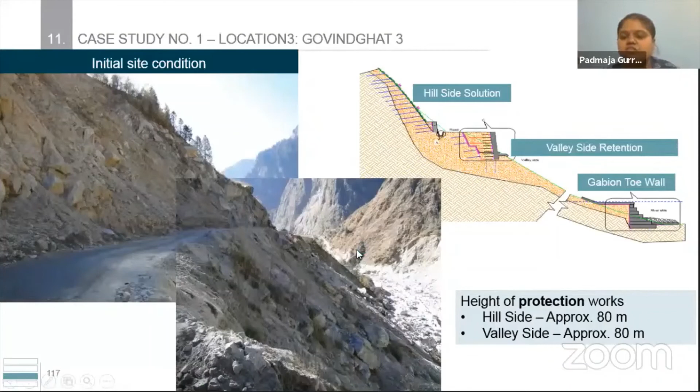Then Birahi, another location is the Birahi landslide. So here, as I told you, a 25-meter reinforced soil system we have built. We constructed there with two types of fascia - gabion fascia and reinforced soil fascia. Inside, erosion control mats, hydraulically applied erosion controls we have used. And here, this is a gabion toe wall.

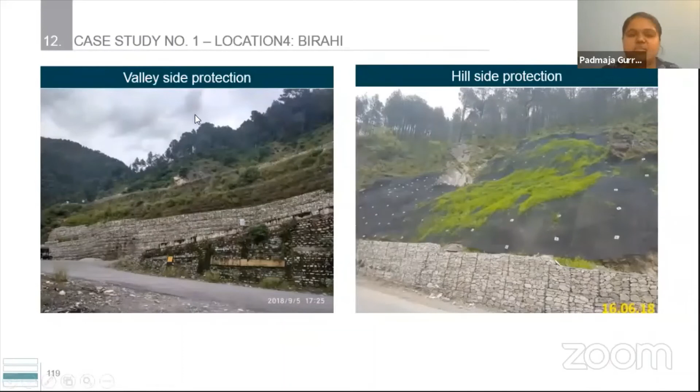Then case study number 2, debris flow mitigation measures near Kedarnath temple. Moving to this, Kedarnath is one of the most holy shrines of Chardham. It receives heavy rainfall and cloud bursts, which trigger frequent debris flows. This carries potential danger and causes deadly destruction to the areas below.

So all this is near the helipad location, and it's a threat to the stability of Bhairavnath temple, which is in the surroundings of Kedarnath temple. So because of this debris movement, all these are getting damaged.

So here, extreme weather conditions and high altitude mean transportation of system is not possible - it's only possible manually by trekking. So in this case, what is the solution which we can provide to arrest the debris?

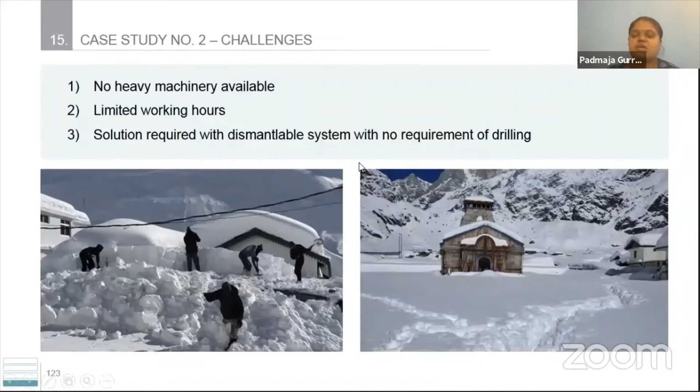So here, few challenges: no heavy machinery available and limited working hours. Solution required is a dismantlable system with no requirement of drilling. So here we can think of debris flow barriers.

We discussed open slope barriers and channel barriers, but all of these will require drilling. So for anchors, if we have to install anchors, we have to do drilling. So here drilling is not possible, so the one and only solution is Erdox.

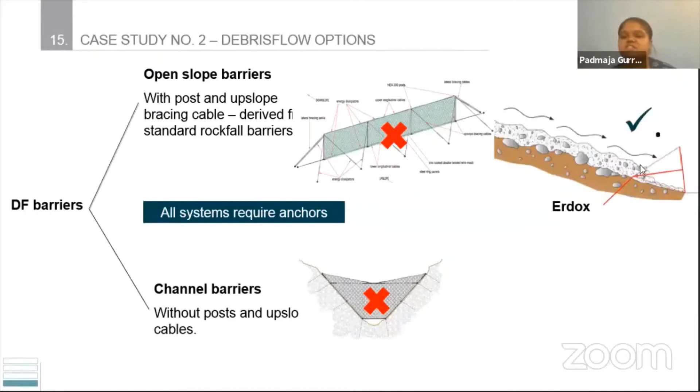So coming to the conclusions, whenever we are treating the hill slope, landslide area, or rockfall area, we have to observe 360-degree, from hill to toe - not only hillside, not only valley side, and not only river side. We have to treat the complete landslide area with engineering drainage design. Before going with mitigation measures, we have to plan the drainage system or drainage network first.

Then we have to do the drainage design and analysis, then go with the mitigation measures. Then use flexible, earthquake-resistant structures compared to rigid structures, which will accommodate the movements - that's what we have to install. Then we can choose instrumentation, so that we can know the movements in the structures, then river training measures, involvement from concept to implementation, employment of local people, and reduction in carbon footprint.

So these are the things which we need to keep in mind before we go ahead and mitigate this solution.